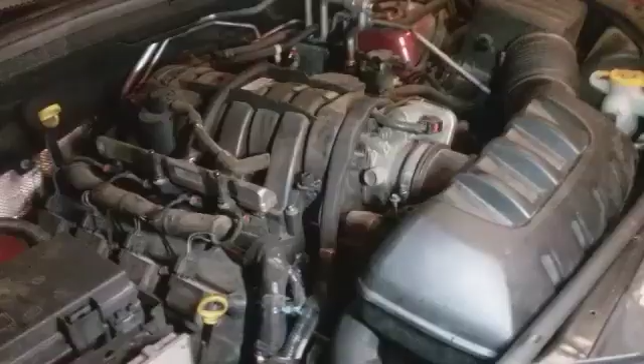2011 Dodge Durango Citadel. It's the 5.7, the 5.7 liter. Just did a warranty replacement for the water pump because my customer was within the year. Not well within the year. I put the pump on last year, but they're still within their year warranty, so this is free for them, like 7-8 months later. But that's not why I'm on here.

I wanted to give some information about diagnosing, checking that infamous code that everybody got on YouTube, the P0344 for these, where you arbitrarily change the cam sensor and the crank sensor down there in hopes that you'll resolve your problem. Ladies and gentlemen, just diagnose your car. That's all I can say, because I can't begin to tell you how many times that code is going to point us in the wrong direction when it comes to just arbitrarily shooting parts at cars in hopes that it'll resolve it. That code sometimes doesn't help.

But I'm gonna give a few pointers. I do have a video. Hopefully this is gonna be the future tense. I'm hoping that this video is gonna go out. For starters, because I am going to say this is a confirmed fix, being that I've driven the car 30 miles with no check engine light. But there's going to be a video I'm going to post shortly after this, after my rant about my issues diagnosing this cam sensor. And in that, you'll see me diagnosing the cam sensor and literally see it falling off.

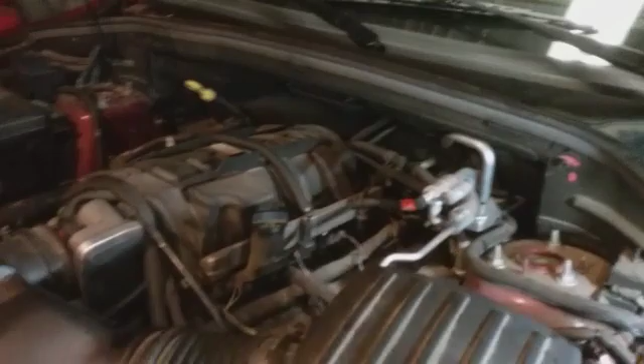I mean, I'm literally looking at voltage over time, and I'm literally not seeing things transpire to the code setting criteria. So I'm like, what the fuck, I'm lost here. So I'm saying right now, I'm assuming that this is fixed because again, I've driven 30 miles with no problems, and the fix for this car, despite the P0344, the intermittent cam fault, was an oil change.

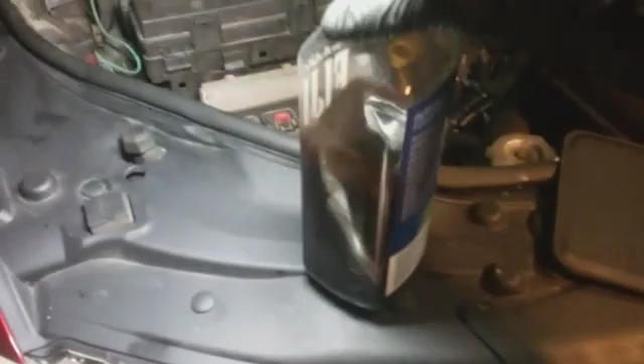So changed the oil, and things evidently started panning out, started working a lot better. This is put in a Fiji bottle. I don't know if you can see this, but this was the oil that was in there.

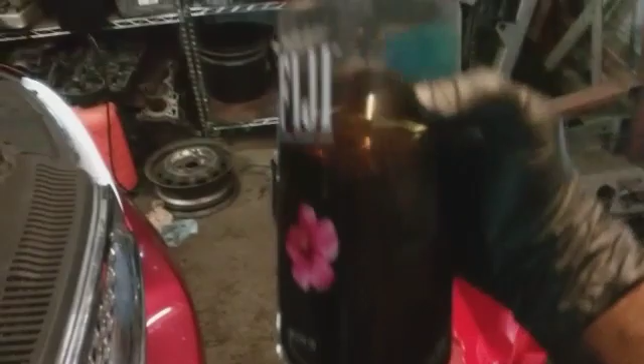Some of it, I mean, it looks watered down, but she did go to an oil change place and they changed the oil, and this is the oil I put in there. I mean, it's clean, brand new. It's definitely more dense and heavier. But I do believe, strangely, once the lady got the oil changed, then she started having more frequent problems.

I think they may have put the wrong viscosity oil in there, like a 0 weight versus 5W-20 was recommended, or either a 5W-30. But these cars are also known for having cam problems. So it could be that the cam is wearing out and the tolerances are probably bad, and it needs like a 5W-30 weight oil in here. That's just my conjecture right now.

So again, I don't have any information as far as directly pinpointing things, but what I do have is some still shots of freeze frame, not a legitimate freeze frame from the computer, but still shots of various RPMs that you can compare with your scan tool. Well, this was at idle. So when you look at it, you'll see that at 600 RPM, what I have in there is the exhaust angle and desired angle. Let me show you.

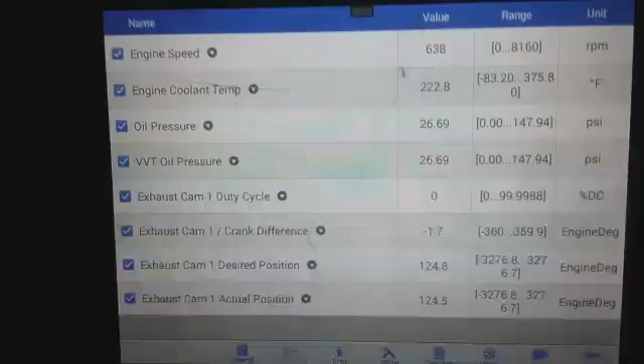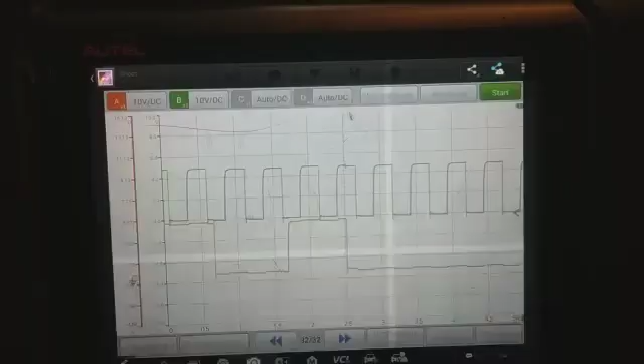All right, so let me go back. Let me go to my photos here, to gallery. So this is 650 RPM. You got the coolant temperature. I've been letting the car run. You got the oil pressure here. You got the VVT oil pressure. It's supposed to be synonymous with the engine oil pressure there.

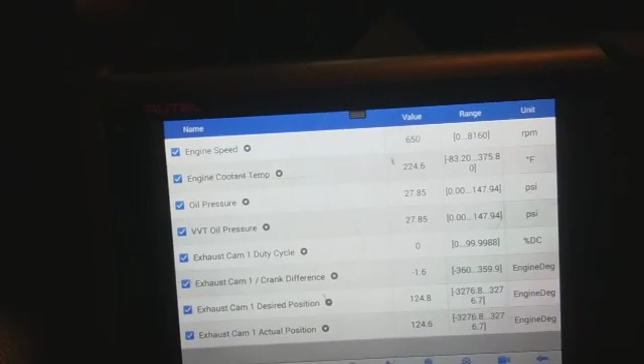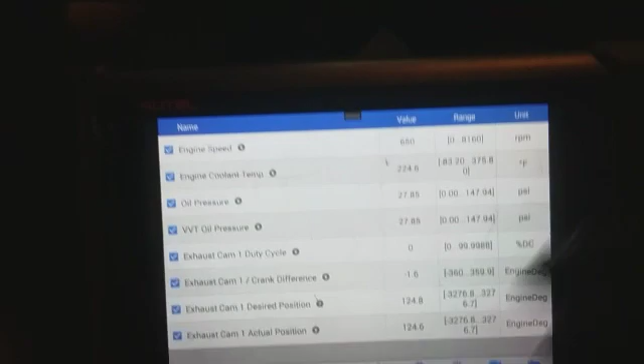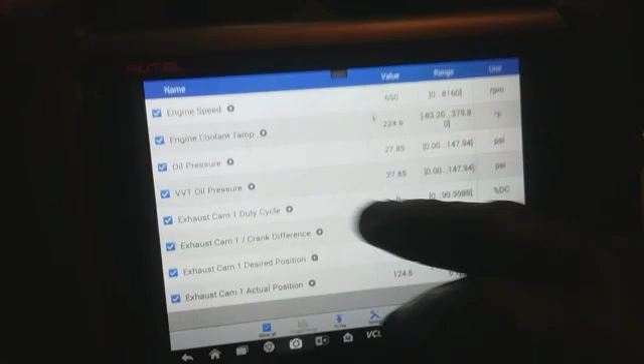And exhaust cam. This is a single cam. It's not a dual overhead cam or anything. The phasers sit in the lifter valley. I think that's what they call these on the V8s. Sorry, I'm not a big person on V8s, but it basically sits behind the water pump in that little valley. Here's the duty cycle percentage at idle. You got the cam angle and the desired position versus actual.

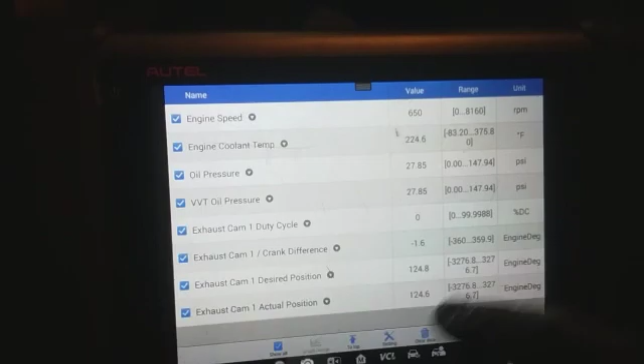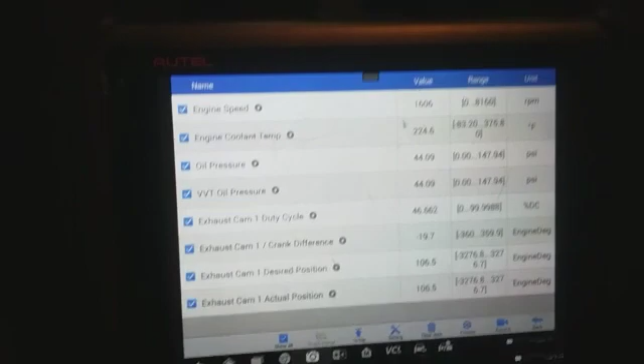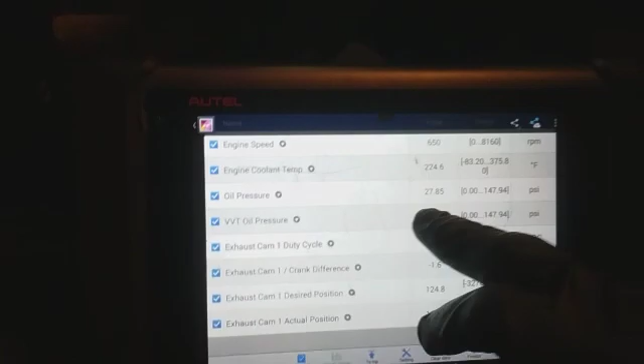All right, I've raised the RPM. Again, this is stationary. Raised the RPM, 1600 RPM. We got this temperature here, oil pressure, and I'm not sure. I think this is like a bias pressure here, because a normal car at idle, 220 degrees, normally it's going to be at probably 25-30 psi. I think that's what it was last time. Yeah. So I think it's right, but I don't know, it doesn't seem right. But there you go.

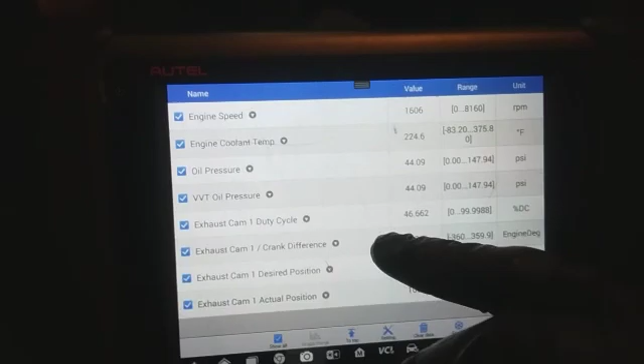This is working, allegedly. If I don't post anything of it, obviously it's fixed. I'm gonna drive this today for the rest of the night and I don't know. So now I'll say during the snap throttle, the exhaust cam angle did go up to, the most I've seen is 24 degrees, but leveling out at negative 19. Well, it was negative 24 and leveled out at negative 19.

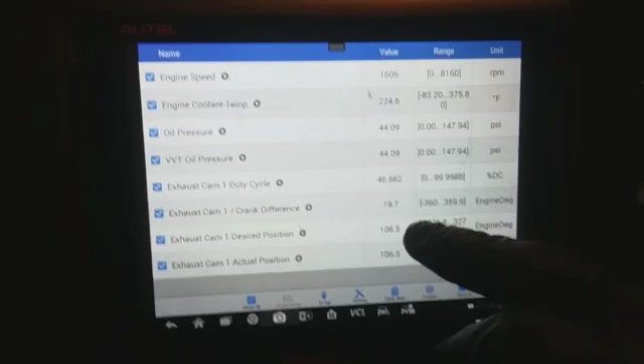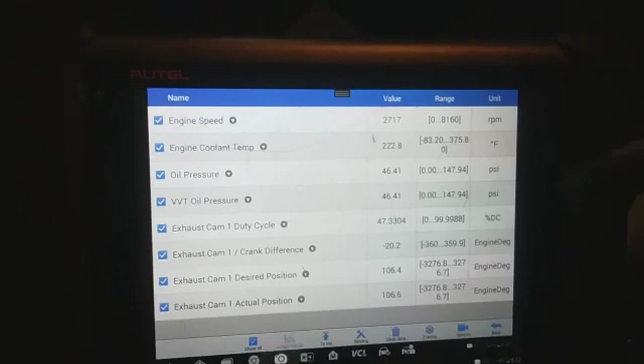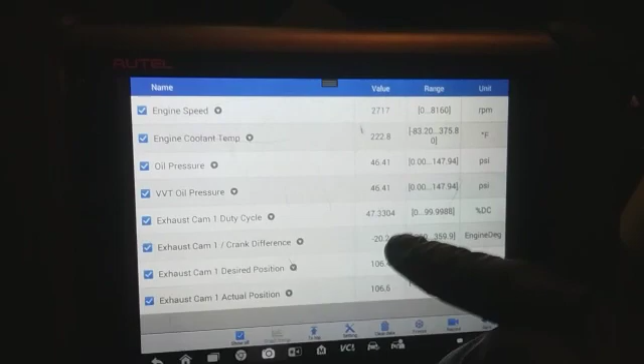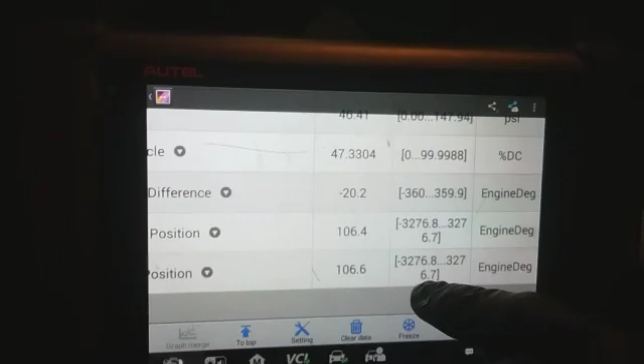So still here you have the actual versus desired cam angle. Here's 2700 stationary again, coolant temperature there, oil pressure, VVT oil pressure. Here we got duty cycle percentage. Now this is me snapping probably right around the rising of the RPM, and it is falling off, and I've seen it level out around negative 20 also, but here you have desired versus actual cam angle, and that's it. So this is some numbers you can compare with yours.

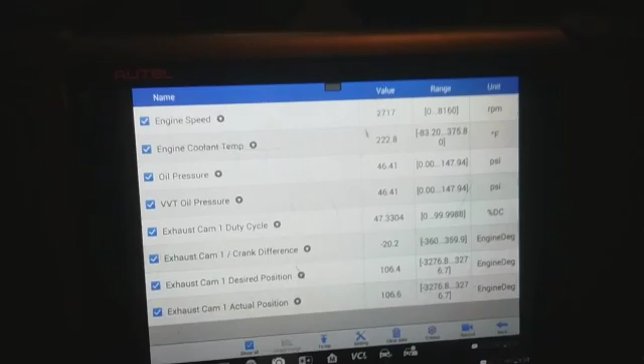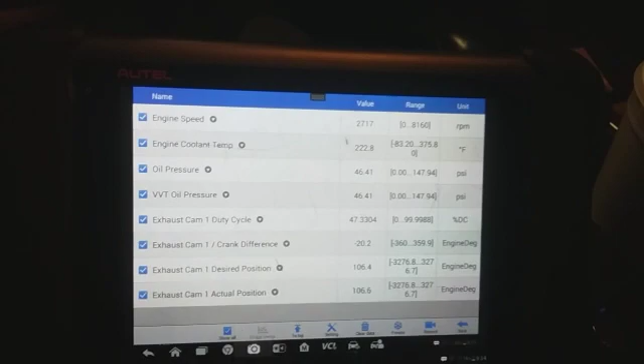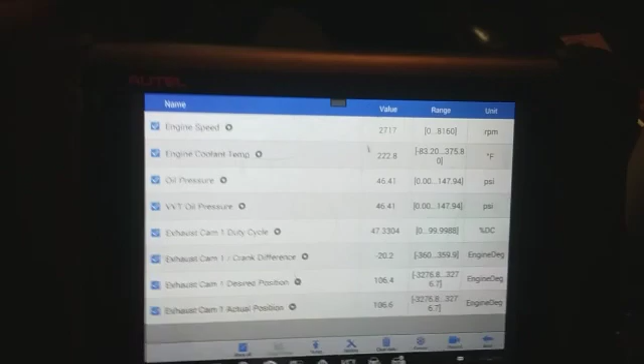I wish I had more information about what caused this, but it makes sense how it could interpret a bad cam signal. Maybe, again, I don't know, because there's no information about this, but maybe the lack of oil pressure, insufficient flow caused the delay with transitioning between on and off, or something with the duty cycle causing the crank to get out of sync.

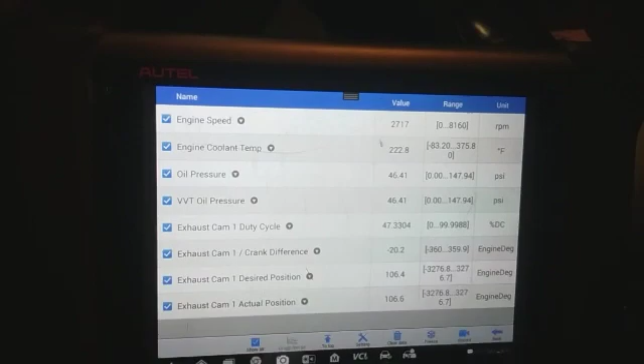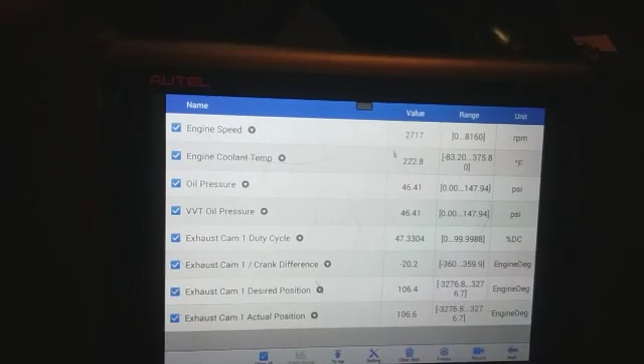You know, so I will say also, while driving and the code was at its worst, it would cause the car to really bog. It would force you to have to slow down, to pull over, to reset things. It was extremely lacking in power, like a misfire.

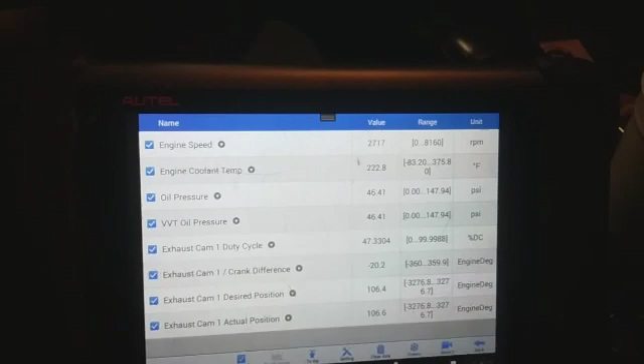I mean, it makes sense for, you know, the oil control valves to do stuff like that, but it would still drive fine, idle fine. I would do a cam and crank sync on here, and it would do fine. At idle, it would be perfectly fine. Revving it up stationary, it would do fine. Under a load, however, is when the problems would occur.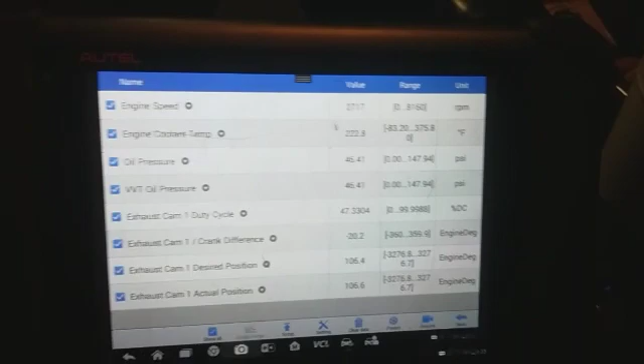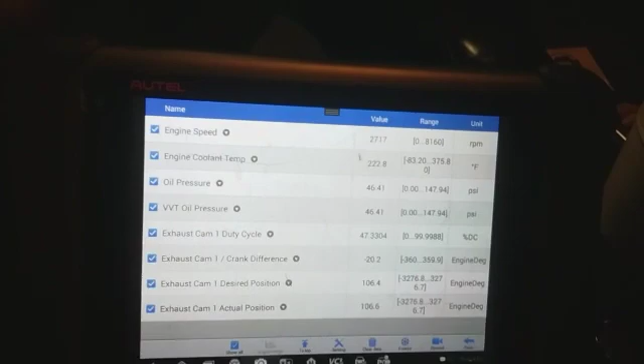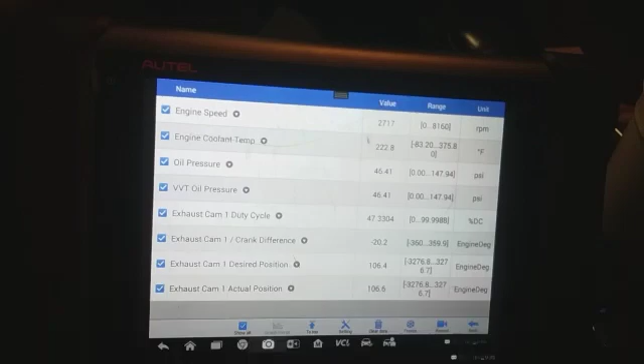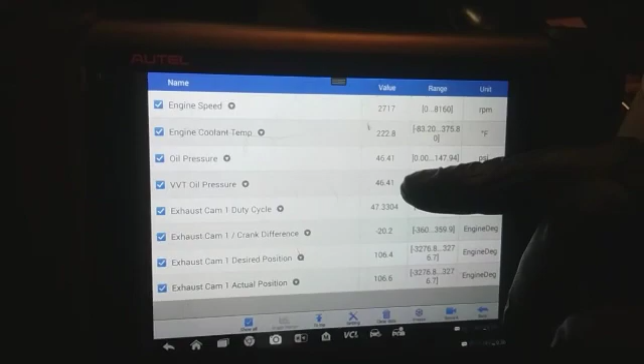So I'm thinking maybe it's a misfire thing, you know, fuel, octane. I'm just getting desperate at that point. No, it wasn't that. I didn't understand if it was a cam intermittent fault, how at idle or revving RPM, snap throttles, nothing would change. Strangely, under load, it would change. It makes sense for it to be the oil at this point, in hindsight, because under load, it creates that demand for the duty cycle to change for this cam to optimize power.

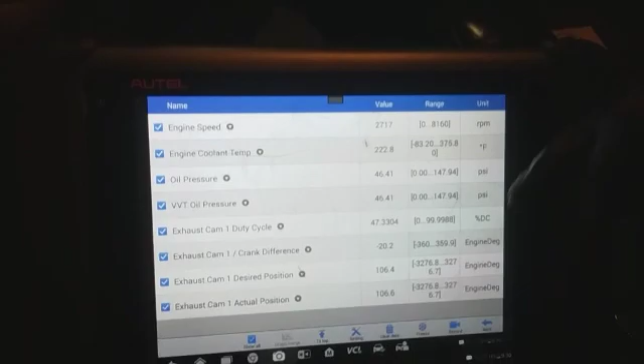So I'm gonna stop talking, and here you have the working info here, my thoughts on it, my theories on it, and maybe somebody can add some additional information in here.

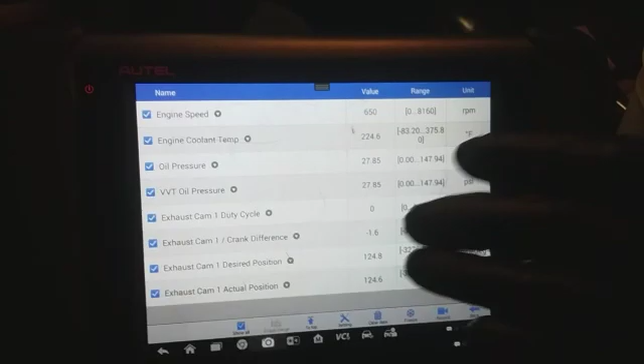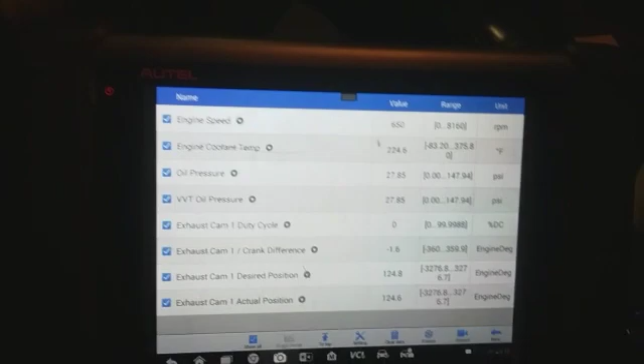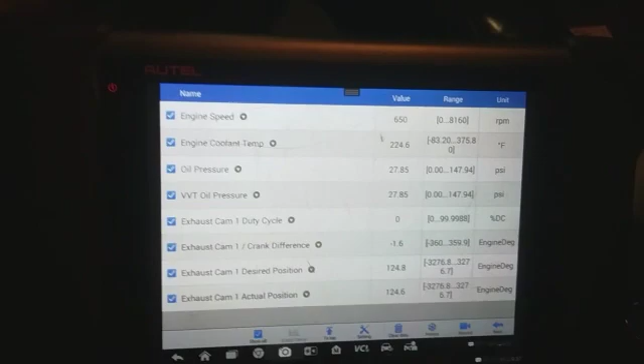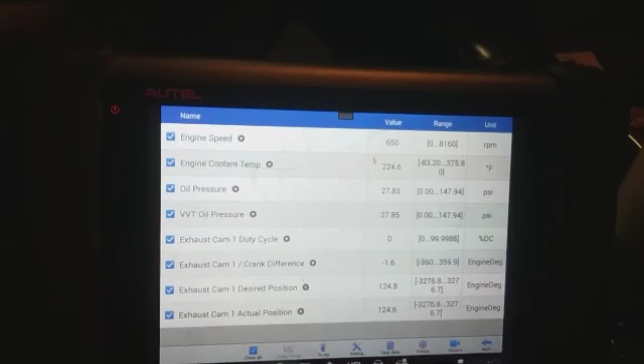Other than that, I'm gonna put up the video of me diagnosing, well, part of it, because I already told you what it is, but mainly I just wanted you to see it falling off. I'm gonna save you the viewing for the most part, because a lot of it was testing wires. It's just a traditional Hall sensor. You have a 5-volt reference, you have a ground, and you have a signal wire. Signal wire is what we're going to connect to look at the waveform.

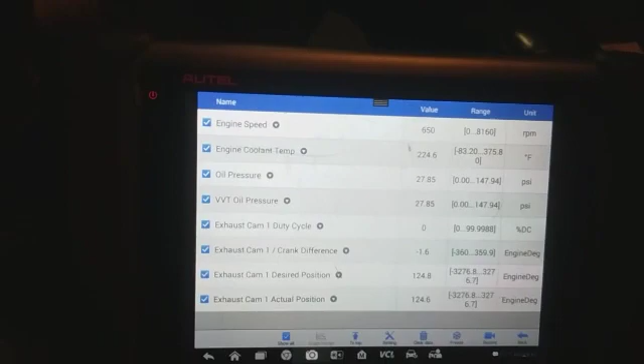And it got to the point where I was doing resistance tests from the computer to the wiring, even though I already confirmed that everything's fine, doing wiggle tests, wasting a lot of time on this, going back over everything 3-4 times, and I'm like, well, I'm just going in circles.

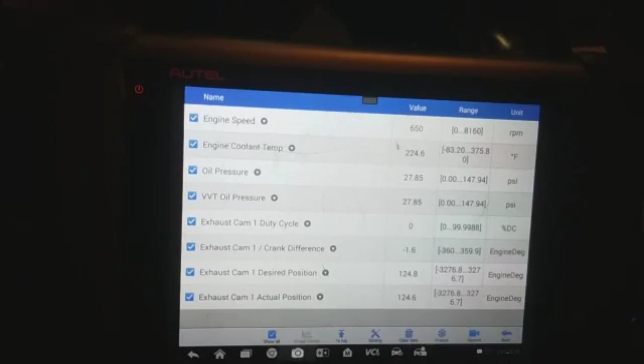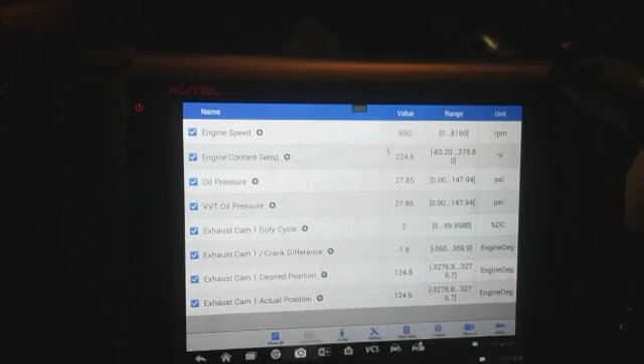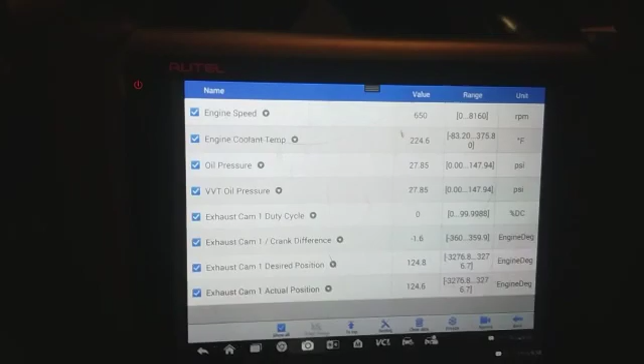Now, on this system, from what I understand, all Chryslers are pulled up, so you're going to have a bias voltage on the signal wire. You'll see voltage there on a digital voltmeter, but when you connect a test light, it doesn't do anything. But one side will faintly illuminate a test light. There's a bias voltage on the signal wire. So be aware. Don't think, oh my gosh, I have voltage here, I gotta look for a short. No, that's just how that system operates from what I understand.

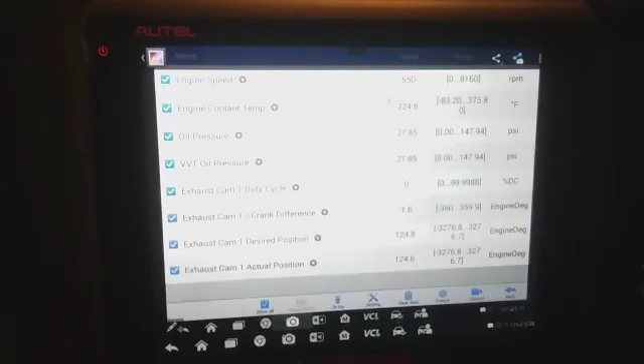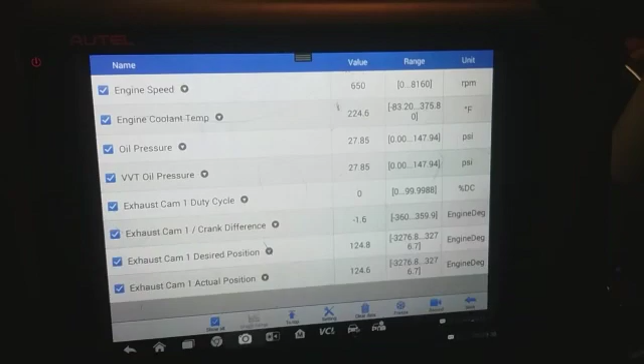So if I'm missing anything, please let me know. But other than that, I'm gonna post that video of the waveforms, the crank and cam, and go from there.

So I'm hooked up now to the crank and cam sensor. Alright, let me see. Here's the wire diagram. For the crankshaft, I went on the brown and light blue. It's a really dark color though, I'll tell you that. I guess it's gonna be dark blue and gray for the cam signal. That wire looked black to me.

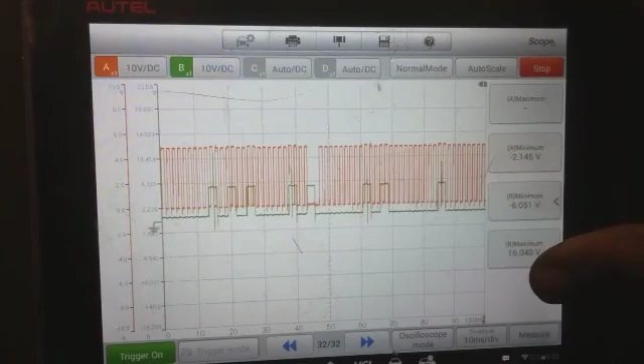So I'm hooked up on them, and I'm gonna monitor the signals. Just glare off the screen. I got it on a 10-volt scale. I do have maximum and minimum there, but it alters so much, it's not even worth having on there. I'm just gonna take them off, because you have to have a specific time base for it to work properly.

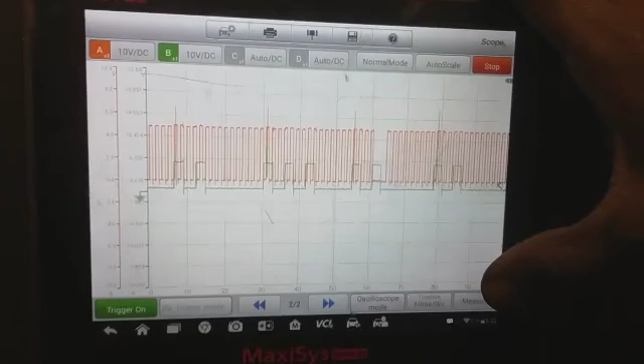So what I'm gonna do is stop it and start it, let it run its course for a little bit, and I'm gonna zoom in on what I assume to be the start and phase of it. I guess it's between that gap on the crank, and I'm gonna see if Identifix has a known good waveform.

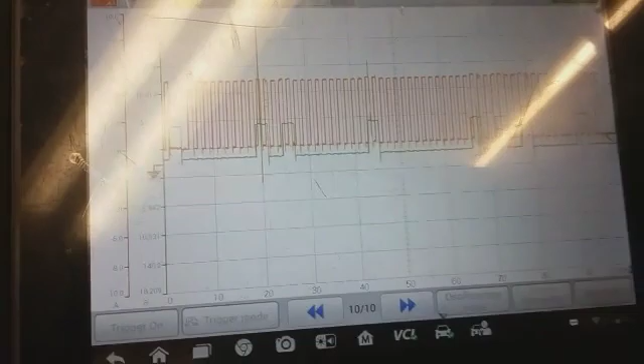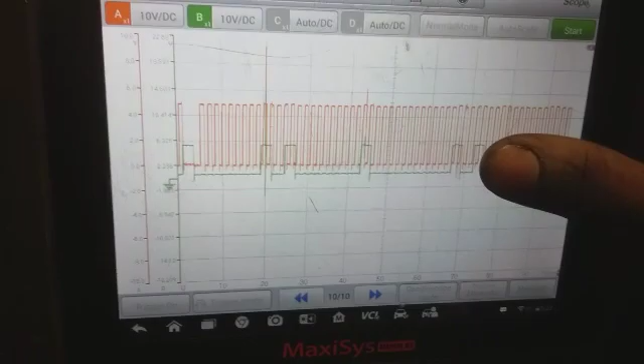But I'm pretty sure that connector probably had something to do with it. Being that the connector was off, it could have just happened to have some intermittent issues and caused the check engine light to come on. It makes sense. The connector was probably just defective. So let me see what I can find on Identifix and go from there.

Oh, how to access the crank sensor on this car: you have to go from the bottom on the passenger side. There's a little heat shield for a knock sensor you have to take off.

That's just, you just expand the ears on it and pull it off. I don't have that button up yet, but there's a little portal hole. I think it's where you drain the oil at, but you can get your hand through there if you decide to take that shield off. I didn't take that off. I just kind of muscled my way through it. Probably might have to do it since the car is hot now. But it is a little difficult to access, and I had to take my razor there and cut through the little shield. So, but yeah, it's on that side over there on the bottom.

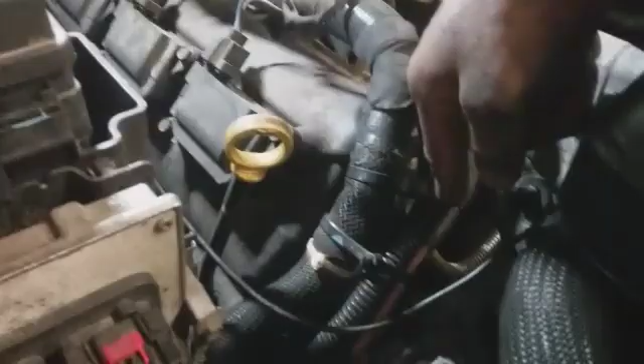If you decide to go through the harness, which I highly doubt, this harness here with this aluminum, I don't know the material, looking insulator down at the bottom, that's where that goes to the knock sensor and the crank sensor down at the bottom. So let me see what I can find out.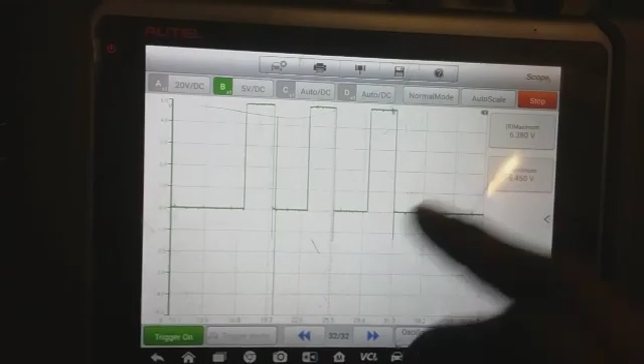Okay, so it happened. It's still hooked up, and that's my cam sensor. Look, it came. Wow, caught it. I caught it. This is great. So what we just witnessed was the cam signal that was lost. The check engine light just popped on, and I was like stuck. I'm like, what should I do? Should I leave it alone? Should I just move? Because if I move, it might just pop back on. So I got the camera on. We saw it. It fell off. We're gonna put a crank sensor in it.

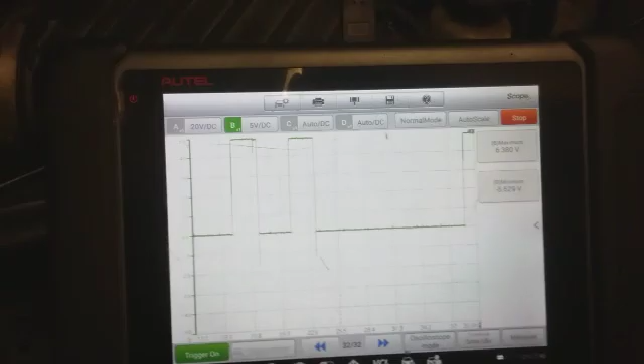The new crank sensor in there. I didn't change the cam. I'm gonna take it on the inner city test drive and see what happens. I'm going to let the computer make the determination, because obviously maybe it's my scan tool, maybe it's the setting in here I'm not putting in, but I'm not seeing it. I'm not seeing anything fall off from the cam, but from Identifix, evidently putting the crank sensor in for the P0344 will resolve this problem.

But I'm hoping I can get as much data as I can, because I don't want to be the part changer, but evidently, I mean, no cheaper than what they are and how accessible this part is, I had to follow suit of the group. But see what happens.

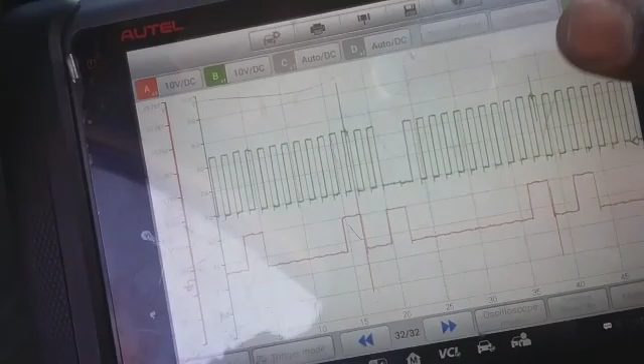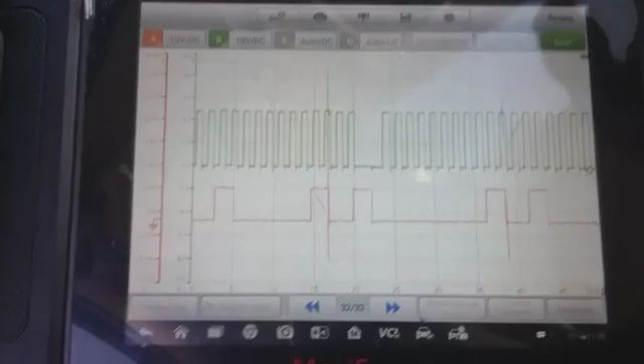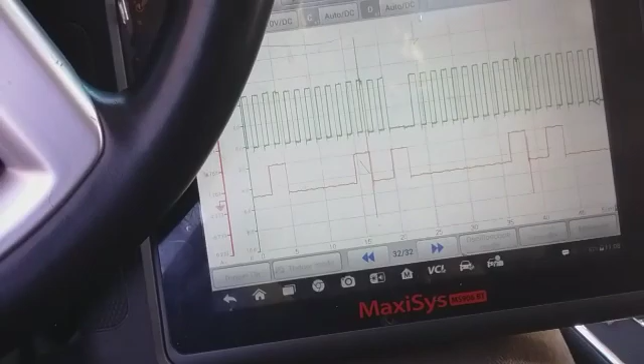All right, after a 20 mile test drive, I got to come back. Code came back. I want to say this new sensor is less frequent than the last sensor, because the other sensor would come on quite a bit. I could clear it, and it'd come right back up some miles later. This is what I'm gonna do. I know aftermarket parts can be bad. I only question this aftermarket one because of some of the ripples I've seen up top here, and I would rather see it be a smooth edge like that.

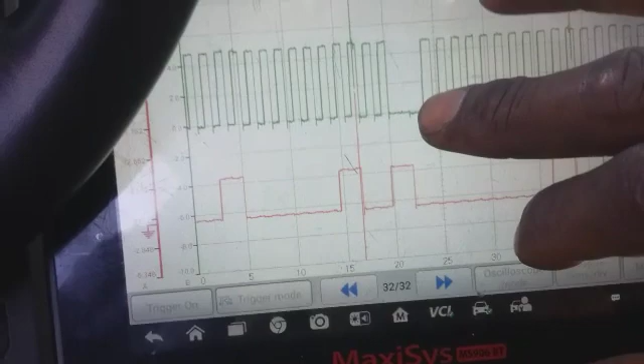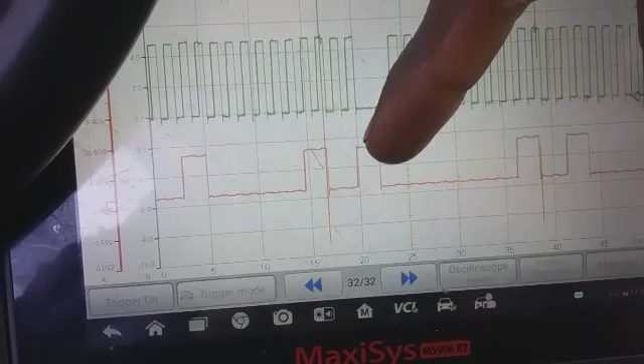I mean, the crank, it could be my connection. Crank could probably be the culprit. I still don't understand how the crank can impact the cam sensor. What I'm gonna do, I really hate to do this, but I'm gonna put both on there. I'm gonna replace this cam sensor, see if this wave changes, if it smooths out at the top like this one, and the bottom smooths out. And I'm gonna change the crank and retest drive it.

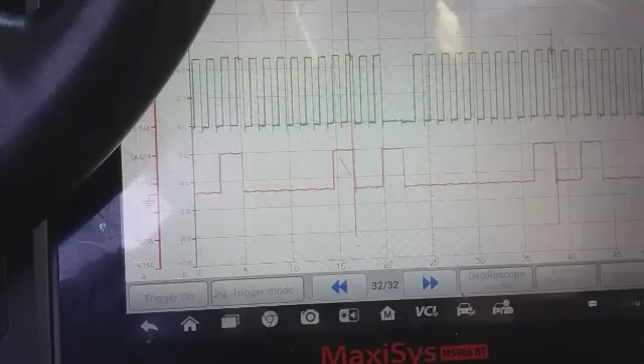It's the only thing I really can do, because I didn't see it fall out while I was test driving. When the light came on, I was driving looking down periodically, and there were no obvious fallouts or anything. So I'm not sure what the computer's seeing that's making it kick the check engine light on. But I'm not sure if those ripples have anything to do with it. So I'm gonna change both of the sensors and test drive it and recheck it and see if this cam sensor wave looks a lot better.

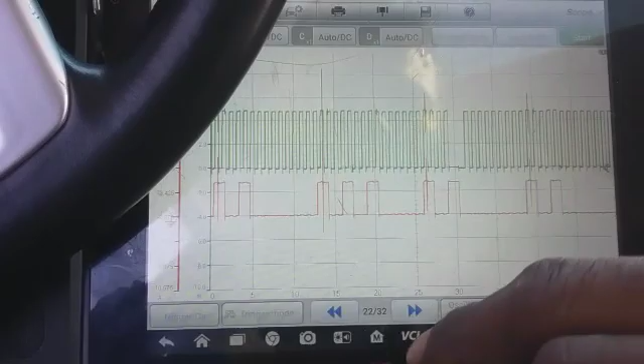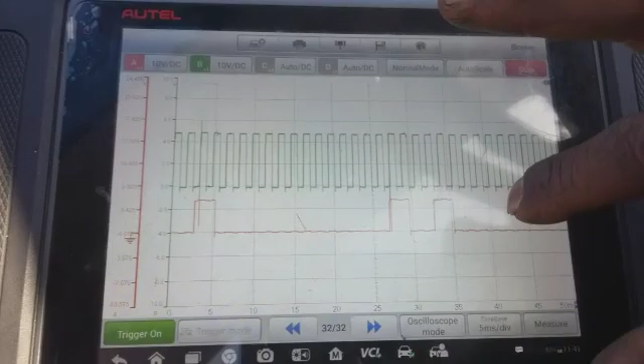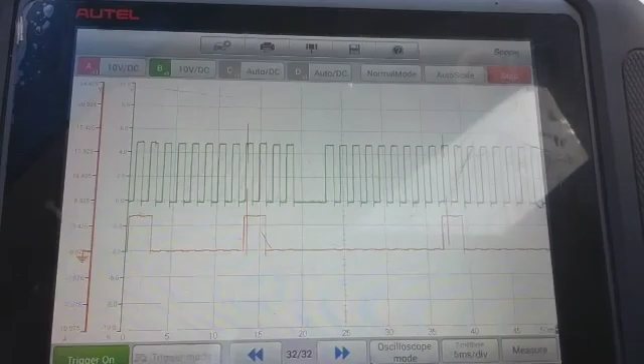The new crank sensor in there. I didn't change the cam. I'm gonna take it on the inner city test drive and see what happens. I'm gonna let the computer make the determination, because maybe it's my scan tool, maybe it's the setting I'm not putting in, but I'm not seeing anything fall off from the cam, but from Identifix, evidently putting the crank sensor in for the P0344 will resolve this problem. I had to follow suit of the group. But see what happens.